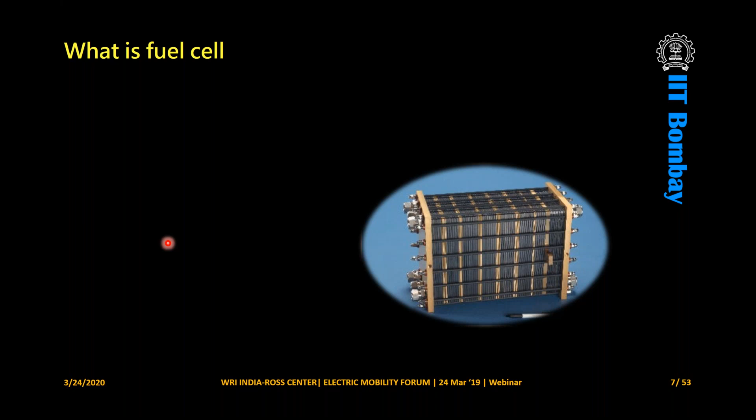That's the reason - one of the drivers is that we want to get rid of the global warming problem, and fuel cell is one of the components or contenders which is believed can also help with that.

So what is a fuel cell? Fuel cell is an electrochemical device which converts chemical energy directly to electrical energy. It has some salient features like higher efficiency, higher lifetime, no moving parts, extremely quiet in operation, and less emissions.

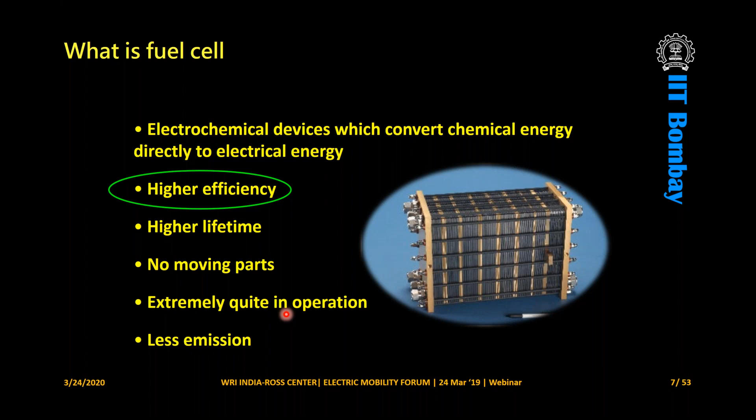If we look at the higher efficiency point of view, to understand how it helps with the global warming problem, let us take an efficiency and business-as-usual scenario: where we are burning coal in a thermal power plant, we get 25% efficiency - that means electricity - and 75% wastage of heat.

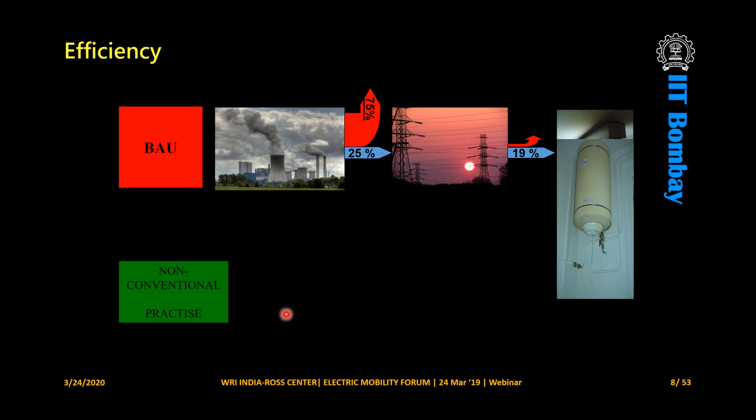If you are transmitting, finally you are going to get in the range of 19% of electricity. This is an Indian context where the transmission loss is also very high. And then this particular energy, which is being transmitted from the thermal power plant, is being used for fan or light. But when it is used for heating the water, then I feel it's a crime, because already we have wasted 75% of the energy as heat, and then again we are using this particular energy for heating the water.

What could be the non-conventional practice and how we can improve the efficiencies? If we take, let's say, normal LPG gas, and you have a burner and directly try to heat, you will be able to achieve 65% efficiency compared to the 19% efficiency, which helps give the life I was talking about earlier, 300 years, that can go immediately three-fold to 900 years. So if you are also taking some appliances which are efficient, it also increases the lifetime of the reserved fossil fuel, so that scientists have some time to think, and then we can have alternative solutions.

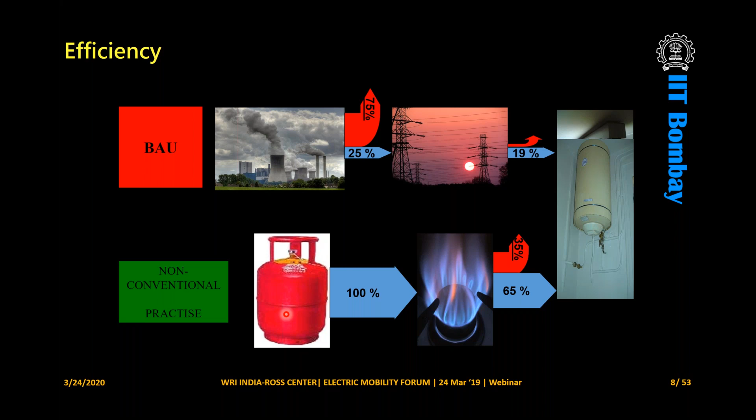Now if you take the efficiency comparison in the conventional system, like at present what we have: fossil fuel, then combustion, then mechanical, then electrical, then electricity. The characteristics of this particular system is it emits direct greenhouse gas, it's a high temperature operation, so you'll be having NOx and other pollution as well. It's lower efficiency, and even if you are operating at partial load, it gives you even worse efficiency, lower than that. And it's loud operation.

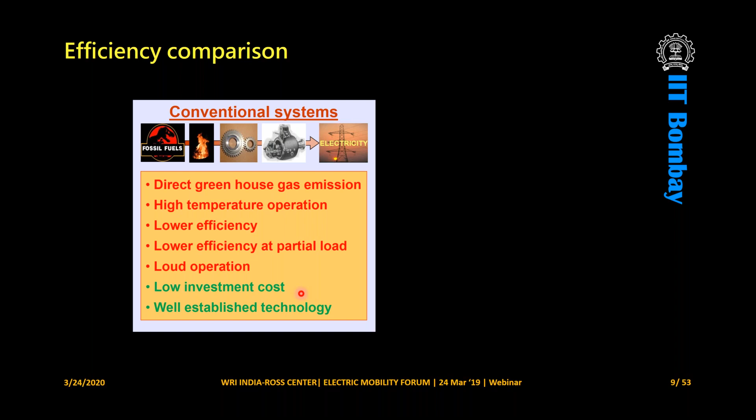The good part of it is it's having low investment cost, as well as it's a well established technology. Compared to that, if you go for fuel cell based technology, it's an indirect or lower emission compared to that, as it's having higher efficiency. The good part of this is that if you are operating fuel cell at partial load, you even get more efficiency compared to the rated power.

So this makes fuel cell very attractive compared to the conventional system. Like if you are going for a city where you will be operating always in partial load, you will be getting much higher efficiency. But in conventional system, we know that if your vehicle is running in partial load in a city type of system, you will be having lower mileage. The other interesting part of this is that it's quiet in operation. The bad part of this is it's actually still in R&D, and it's having high investment cost at present.

Now, also I wanted to share one more thing. When we talk about efficiency of the conventional system as well as the fuel cell based system, I'll be taking a ballpark number. In case of fuel cell, we say 45 to 50% efficiency, what we have achieved. Compared to the conventional system, when you are talking about, let's say 30%, so there are people who can argue that it's only 15% difference, not a big deal.

One thing we should remember: in case of conventional system, when you are talking about efficiency, it is the highest achievable efficiency. When you are talking about the fuel cell, it is the lowest efficiency that we can get, and at partial load it will be going up. So these are actually the two extreme boundaries of the band that we are talking about in the efficiency range. In one case it is the minimum, in the other case it's the maximum. So it's not good to compare the efficiencies directly when talking about fuel cell and a conventional system.

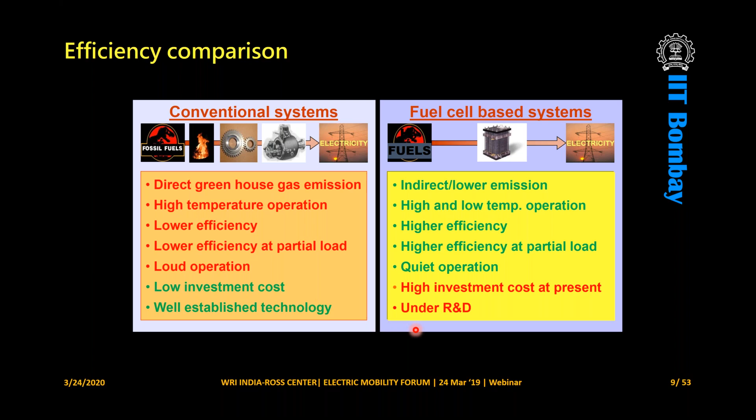Then for the efficiency comparison here, temperature is plotted against efficiency, and this is the fuel cell efficiency. You can see that with the increase in temperature, fuel cell efficiency comes down. With the increase in temperature, the Carnot efficiency increases, and it looks something like that. You can see that at the low temperature region, you will be having much higher efficiency compared to the Carnot efficiency. And ideally, you'll be getting at standard condition around 83% efficiency, as shown here.

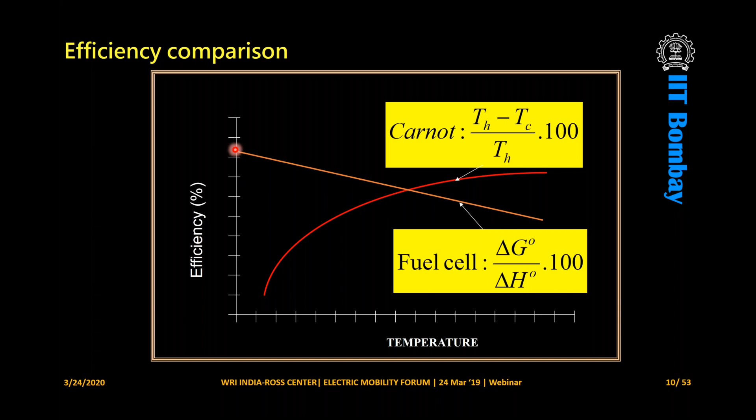How a fuel cell looks like and how it is different. In the next few slides, I'll try to construct the fuel cell from an IC engine point of view.

In case of a fuel cell, fuel and oxidant is being given. Like in a conventional IC engine chamber where you are giving fuel and oxidant together, as soon as you give them there, combustion will take place, and as a result of that combustion, the fuel will be oxidized and oxygen is going to get reduced, and finally you will be getting combustion taking place.

And if you see very carefully, you will be able to know that oxidation and reduction means there is an electron transition taking place there, and so then we are going to get heat.

Now we know that electricity is nothing but the amount of electrons flowing through the external circuit per unit time. So what we are seeing here is that electrons going from fuel to oxidant, and then we are getting oxidation and reduction.

Somehow if you can arrange this electron mixing, we can get this electron through our external circuit. So instead of getting heat and light, we can get electricity. That means when we are converting chemical energy, we can get either chemical to heat energy, or we can avoid heat and get directly electricity.

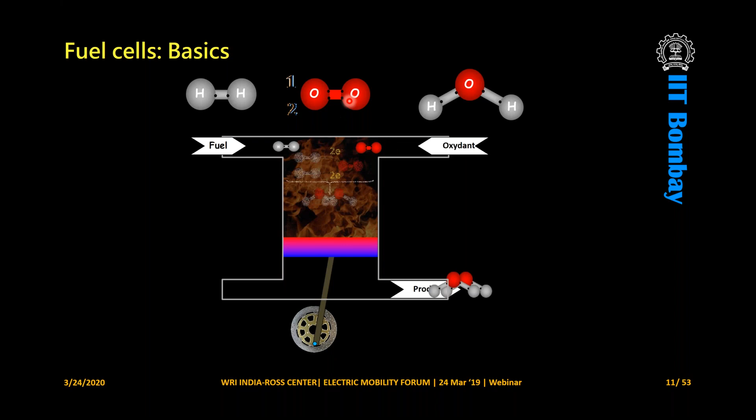How can you do this? For doing this, the first thing you need to do is arrest this electron that is going from hydrogen to oxygen, along with the oxidation and reduction that is happening there.

So for that, first you try to take a membrane like this, which arrests this electron movement from hydrogen to oxygen. Instead of having one chamber like in the combustion chamber, now we have made two chambers, and electron cannot go from one chamber to the other through this particular separator, but this separator will be good for maintaining charge neutrality.

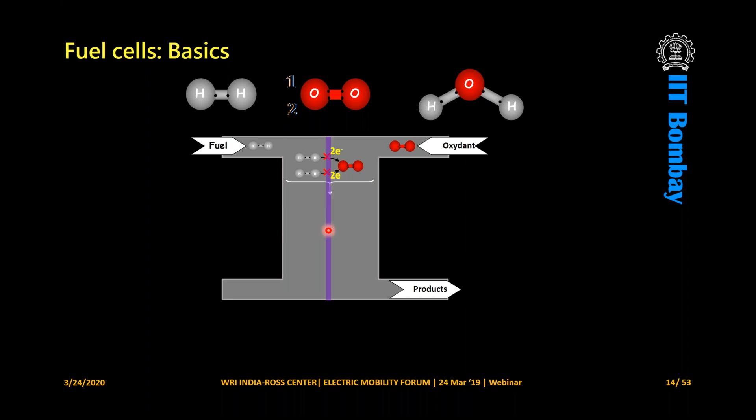So it will be allowing ions to move, and then what will happen with the electron? This is that small place, the separator, and now this electron will be coming here and it will be going through the external circuit, and then you will be getting electricity produced.

On the other side, electrons will be coming through this, your ions will be coming, and then they will be combining together with oxygen, and you will be getting the same reaction we talked about in combustion. But now it is a controlled electron movement, so you can get electricity instead of heat and light. So you will be having two chambers separated by a separator, and a site there where oxidation can take place.

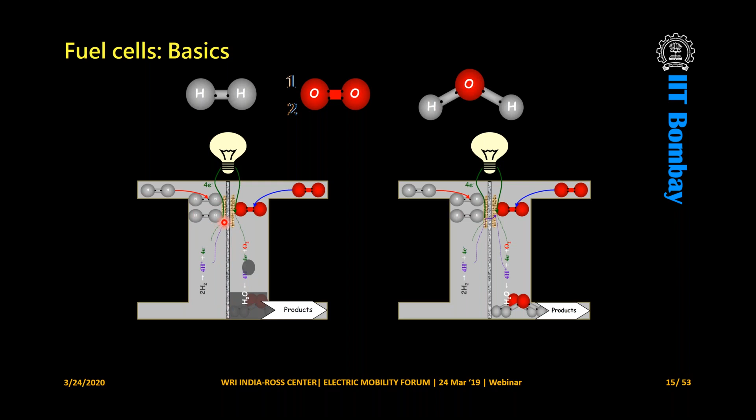So if you go to the basic configuration of a fuel cell, how it looks like: you will be having an electrolyte. We call this an electrolyte. This is earlier what I was talking about, a separator which separates both the chambers.

Then you will be having a catalyst layer. Here you will be having one catalyst layer. This is the other one, we call it an electrode. Then you will be having a gas diffusion layer, also called a support layer, which gives support to the catalyst layer.

And then finally you will be having the flow field through which gas will be passing through the fuel cell. One side you call the anode, the other side you call the cathode.

Now, when we talk about the dimensions, I wanted to mention here: the typical dimension of the electrolyte in a fuel cell will be in the range of 100 microns, which is like a normal A4 size paper thickness. Then the electrode will be in the range of 15 to 20 microns. After that, the gas diffusion layer will be in the range of 0.3 millimeters, that is around 300 microns.

And then if you see the flow field design, that flow field will be in the range of 3 mm. So I was trying to tell you that the increase in dimension is on the order of magnitude of almost 10.

The actual reaction that powers this happens between the electrolyte and the electrode, which is hardly 100 microns thick. Why I'm telling you this is because in the next few slides we'll be talking about the volume, space, and weight required for the transport sector, and who is contributing to that, and really what the contribution is. That's what we are going to discuss.

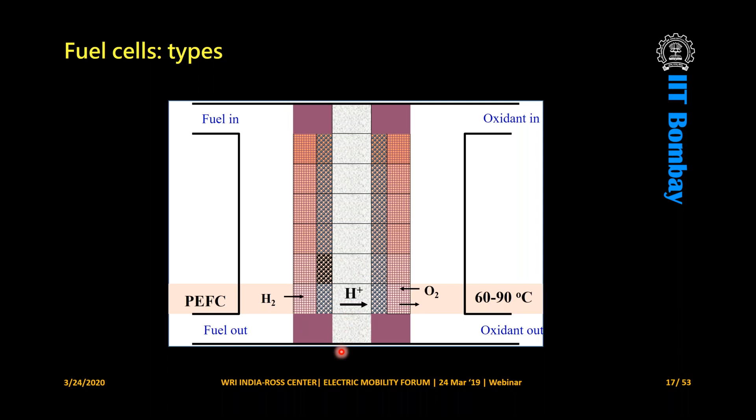What are the types of fuel cells? There are different types available in the market, like the polymer electrolyte fuel cell. This is one where hydrogen is used, and the H+ ion goes through the electrolyte, and through the external circuit you get the electron coming out, giving power and electricity. You use oxygen here, and you get water as a byproduct.

Similarly, the other one we call the direct methanol fuel cell, where methanol is used as fuel instead of hydrogen, and the rest of the things are similar to the fuel cell.

The operating temperature increases as we go along, and different types of fuel cells come up, like the alkaline fuel cell. I don't have time because we want to move to other things, so I'm going a bit fast here and not discussing too much. I'm mainly discussing this thinking of a wide audience, since probably some people will not have any idea about fuel cells. For those who already know, I apologize, because we'll be discussing more interesting aspects in my next part.

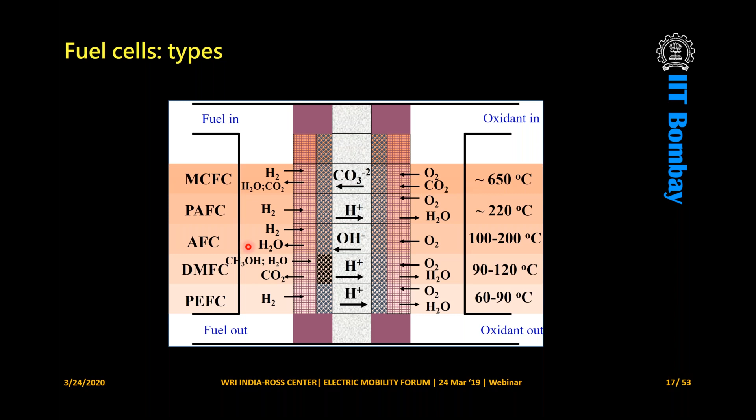The next one is the molten carbonate fuel cell, with operating temperature of 650 degrees centigrade, and the other is the solid oxide fuel cell, which is 750 to 900 degrees centigrade. You can see the temperature increasing from room temperature to 900 or 1000 degrees centigrade. Based on this, for different types of applications, different types of fuel cells are used.

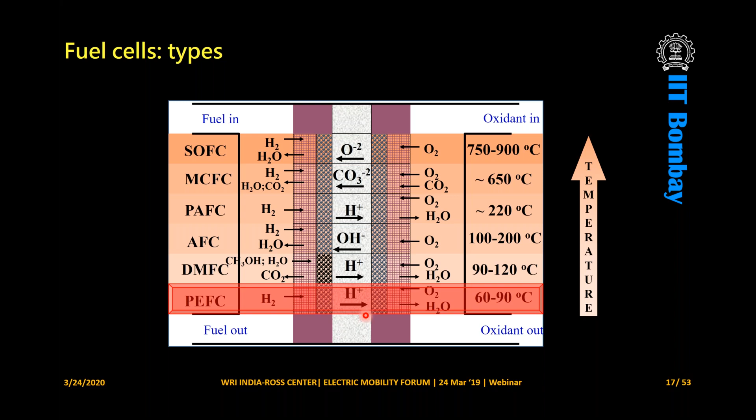For the automobile sector, the polymer electrolyte fuel cell is considered the main contender and is being explored.

I'm going very fast in this slide. The naming of fuel cells is very interesting—sometimes names are based on the electrolyte, what I was calling the separator in the middle. So you have alkaline, polymer, phosphoric acid, molten carbonate, and solid oxide fuel cells. These are mainly named based on the electrolyte.

Also, when using the fuel as the basis, some fuel cells are named accordingly, like direct alcohol fuel cell, direct methanol, direct ethanol, direct borohydride, direct carbon fuel cell, direct formic acid, and microbial fuel cell. These are based on the fuel being used.

Now we are concentrating on the fuel cell important for the automobile sector: the polymer electrolyte fuel cell. In this type, hydrogen is given and oxidized on the anode, then the electron goes through the external circuit, while the H+ ion goes through the electrolyte to the cathode side. On the cathode side it combines with the electron and oxygen to produce water. This is how electricity is produced in a fuel cell using the oxidation tendency of the fuel, mainly hydrogen.

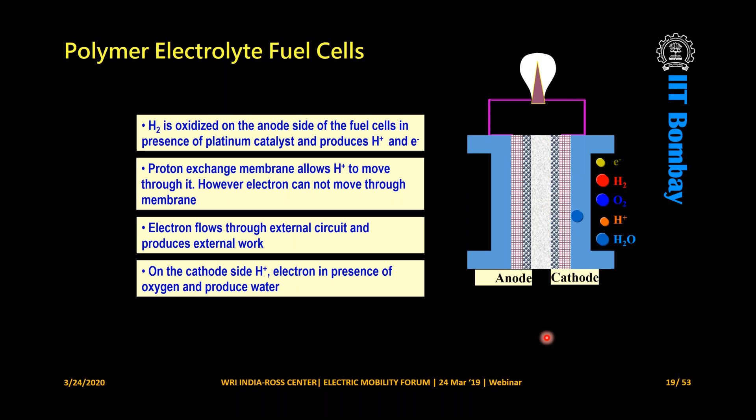Now let's look at the thermodynamics of the fuel cell a little. If we talk about the fuel cell voltage, how much you get per cell can always be calculated from the Gibbs free energy divided by the total Faraday number, and that number comes out in the range of 1.23 volts per cell.

This is very important because when thinking about the stack and other things, it helps to understand why we need a multi-cell stack. We can get this from the delta G value for hydrogen and oxygen giving water, which is 237. If you divide by N equals 2 and F equals 96485, you get 1.23 volts per cell.

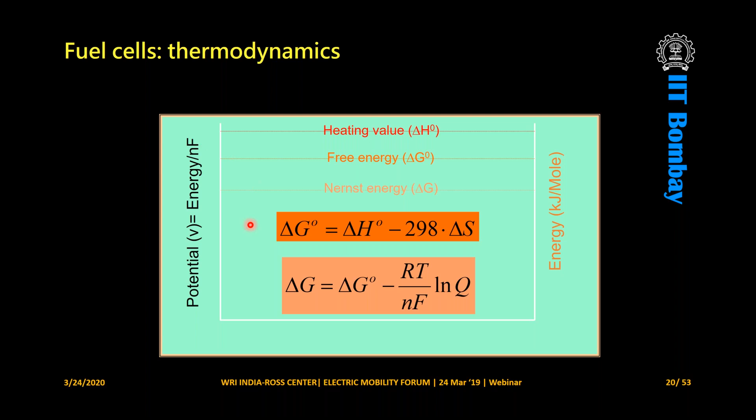But this is an open circuit voltage. If you are going for the operation, then you'll also have to accept the losses. There are different types of losses we call sometimes overpotential loss or polarization loss. These are the different names, and these are the different types of losses: activation loss, ohmic loss, and concentration loss mainly. And these are the equations.

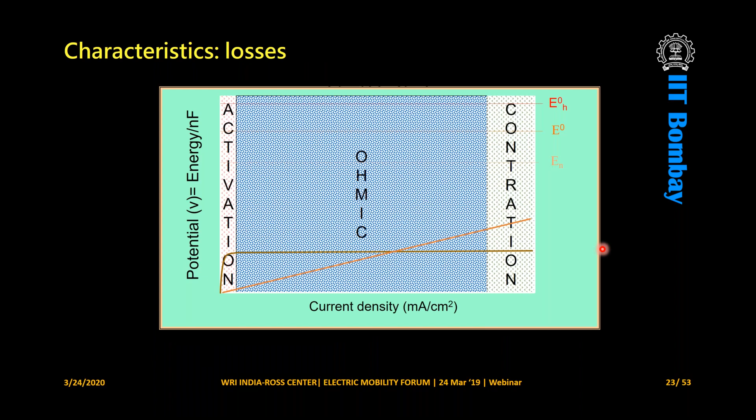We are not going in the detail of the equation, but we can go by the trend. So activation losses look like this, and ohmic loss is linear, it follows Ohm's law. And this is the mass transfer loss or concentration loss, which is dominant in this zone for the current.

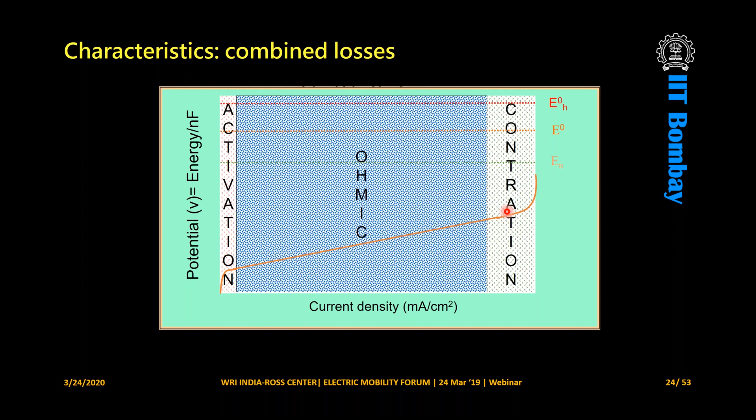If you combine all these losses, the loss looks like this. So you'll have an activation losses zone, ohmic zone, and then this zone dominated, and finally the characteristic curve of the IV characteristic curve of a fuel cell looks like this. So if you are increasing the current, you'll be getting a voltage like this.

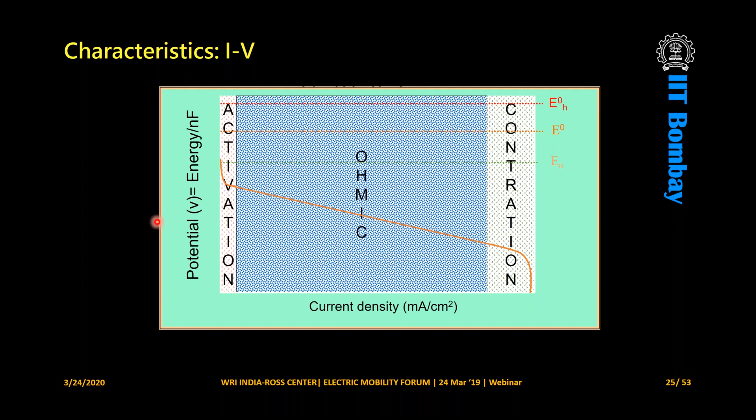Let us take an example of an A4 size paper. I have made an electrode fuel cell of electrode area of an A4 size, which can give you approximately 600 centimeter square area. And if I use that type of electrode, from this power I can get in the range of 300 watt, because 600 into 0.5 watt per centimeter square is going to be 300. So from a single cell I can get this now.

Earlier I told my membrane thickness is also like an A4 size page thickness. So you can think that you have a membrane of thickness like an A4 size page, and you can get 300 watt out of it. If you are attaching two electrodes on both sides, it is hardly 15 micron. And if you use it like this, you'll be getting 1 kilowatt. So that's why it really has very high power density - that's why it's so attractive for transport application.

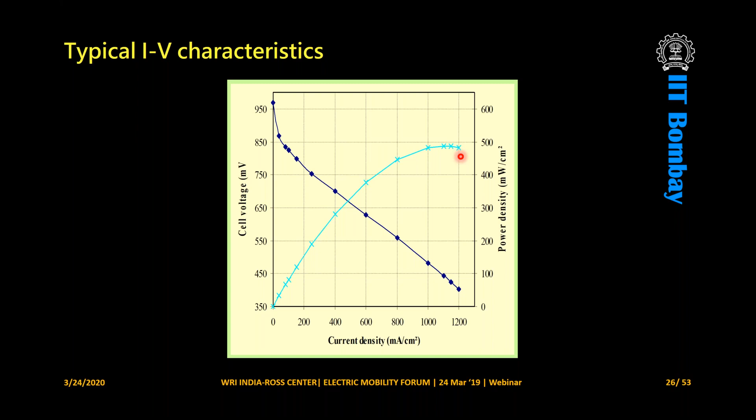Now, electrode - what is there? When you are talking about this particular reaction, hydrogen is getting oxidized and becoming H plus ion and electron on the anode side, and on the cathode side, oxygen is getting reduced with H plus ion and electron, giving you water. You need, if you want to perform this at room temperature or very low temperature, a precious metal catalyst like platinum. It looks like this, but platinum you need in very small size - generally 2 to 4 nanometer, that's the platinum size - but that is being structured and designed on a carbon which has a size of 20 to 40 nano.

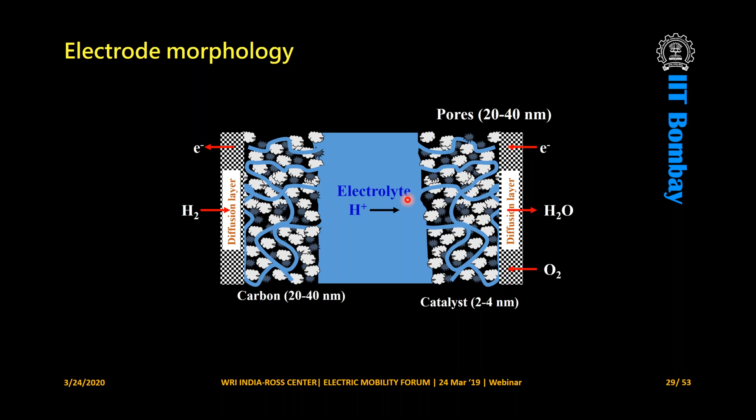So here you can see carbon, and these are the platinum. And then you will have a porous carbon electrode that is being made. Why need porous? Because through the pores gas can go and then react on the platinum surface. This is one of the things people believe is the main culprit why fuel cell is not coming into the market. And then the morphology - if you see, this is your electrolyte, and this is your electrode, where gray color is your catalyst and white color is your carbon. And then you have also a noodle type of design which connects all the platinum to the electrolyte, so that H plus ion can move through this electrolyte and go to the other side. So this is the electrode morphology.

Then the next one, as I was telling, after electrode you will have an important component, the bipolar plate. So the role of the bipolar plate is to distribute the gases.

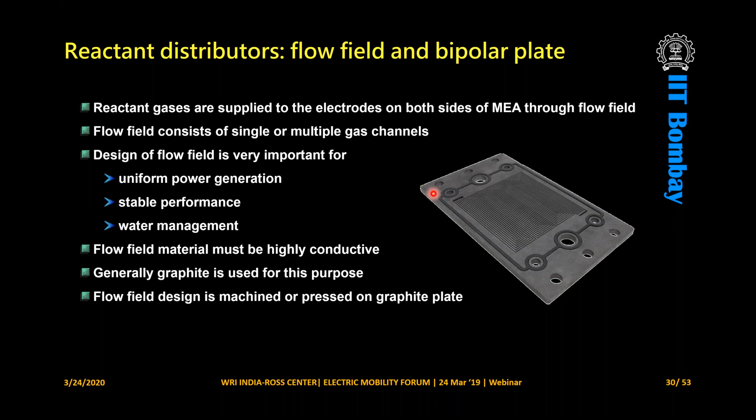So you'll be having channels through it, and the gas is getting distributed. This particular plate has a thickness of 3 mm, and that's why the entire volume and weight is going to come mainly from this component. If you are thinking about the automobile sector and want to do R&D, you need to work on this. At present, people try to use graphite based plates, which is why you need a very thick plate. These are some of the conventionally used flow fields. And if you are giving gases, you'll have a pressure drop, which creates non-uniformity if you are making a scale-up system when going from the lab scale to the automobile sector.

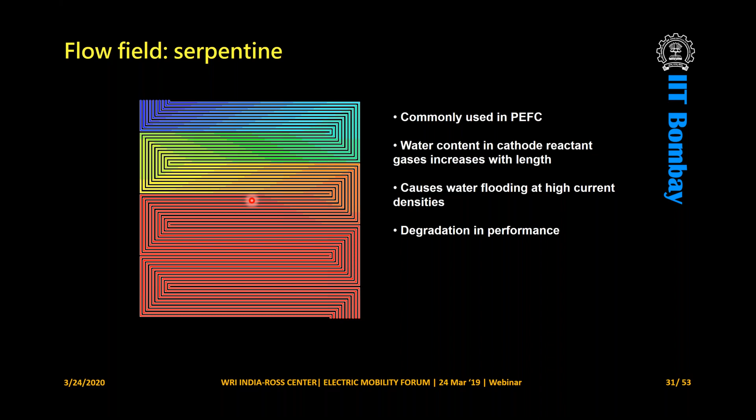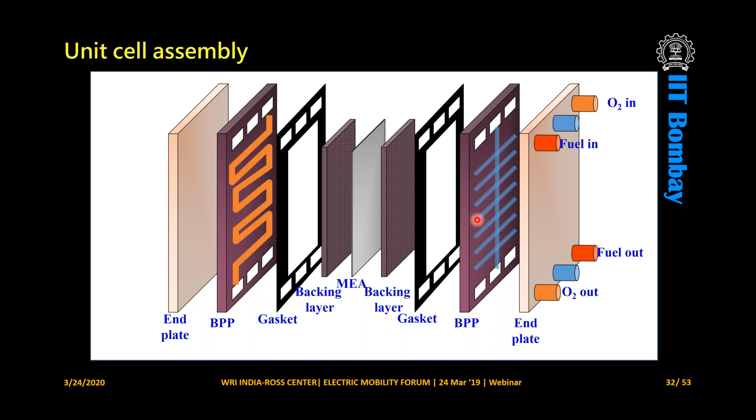If you see that unit cell, this is another way of looking at it. This is your membrane electrode assembly, known as MEA. Then it's your backing layer or diffusion layer, then your gasket, then your bipolar plate. From both sides you make an end plate, and your single cell assembly is ready, which will be able to give you a voltage of 0.5 or 0.6 volt. These are the inlets: fuel inlet, fuel outlet, oxygen inlet, outlet, and you will also have a coolant inlet and coolant outlet. This is the unit cell assembly.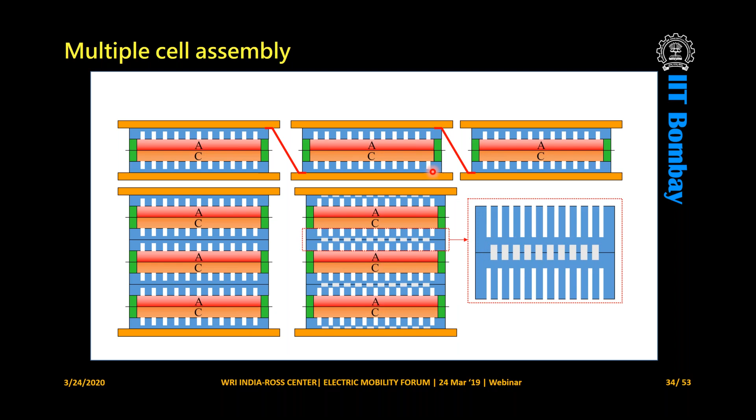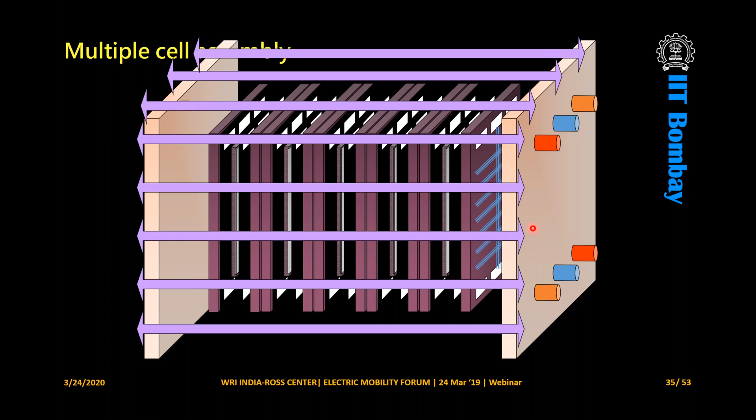Now, if you want to make multiple cells, you need to put them in series. But this is not the right way of doing a series connection; you can put one after another. So you can stack this, and we call it a fuel cell stack. Anode and cathodes are there combinedly, and this is how it looks like. When you have a multiple cell stack, you are putting multiple cells together and stacking them, reaching a desired level of voltage and also a desired level of current from the electrode area. So this is how a fuel cell looks like.

Now, where does this fuel come from, what fuels can it accept, and where does this fuel come from? There are three different ways that we can get fuel: one is from fossil fuel, another is from nuclear energy, and third is from renewable energy. If you are talking about fossil fuel, this is a conventional way of producing hydrogen, where coal, oil, or natural gas is used. In case of renewable, you can use solar thermal, solar photovoltaics, wind, or biomass, and you can also get hydrogen.

Now, in case of fossil fuel, this is the chemical energy, and then you can use reforming. I'm not going into more detail of this, but through reforming you can get hydrogen. However, an important thing is that after reforming you can also get carbon monoxide, which is very much poisonous for the catalyst used in the fuel cell.

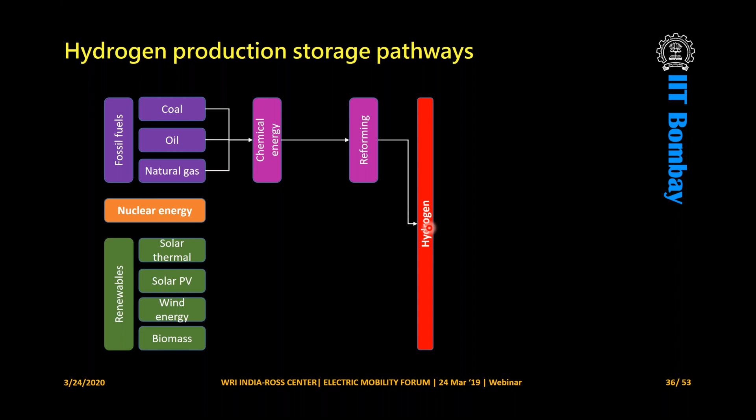The other option is nuclear energy or solar thermal, where you can concentrate with a higher concentration and use that thermal energy to directly do thermolysis of water instead of electrolysis, producing hydrogen and oxygen. It is also thought that this would be one of the sustainable backbones for the hydrogen economy.

Next, if you are using solar photovoltaics and wind, you can directly get electricity and use it in the electrolysis process. So sometimes it's called solar hydrogen or renewable hydrogen. The advantage of this is that you will not have any poisonous carbon monoxide in it, so you can directly use it in a fuel cell without any problem. Also, in case of biomass, similar to natural gas, you can get hydrogen from biomass as well through reforming.

After that, you get this hydrogen, and you need to store that hydrogen. There are different options available for it. You can also do reforming on board sometimes, but instead of on board reforming, it's better to do reforming centrally and then store it on board. That will be a much better option.

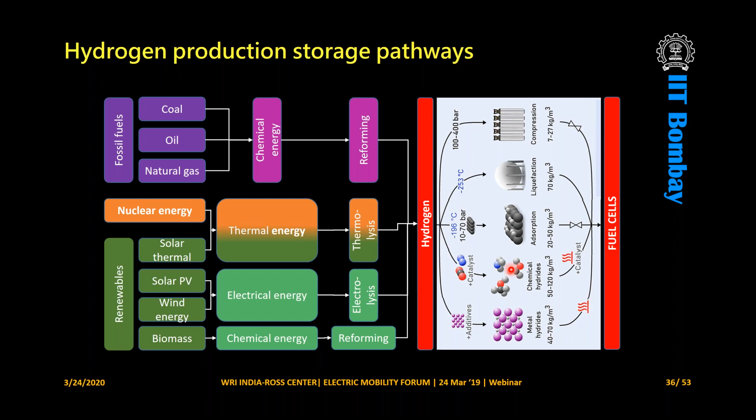Now what are the targets for hydrogen storage, given by DOE. This is the target for gravimetric capacity, in weight percent. Sometimes people get confused - this is not only the materials, it is the system capacity, meaning your material plus the system balance of plant. That system gravimetric capacity should be 4.5, 5.5, and ultimately 6.5.

System volumetric capacity is 30, 40, and 50. Now I wanted to give an idea that if you are storing hydrogen at 700 bar, the volumetric capacity becomes 62.5.

The refueling time should be 3 to 5 minutes. This is one of the major bottlenecks if you are going for metal hydride and other storage. But for high pressure tank, this is an advantage because you can easily store at 700 bar within 3 to 5 minutes, and the total life is expected to be 1500 cycles.

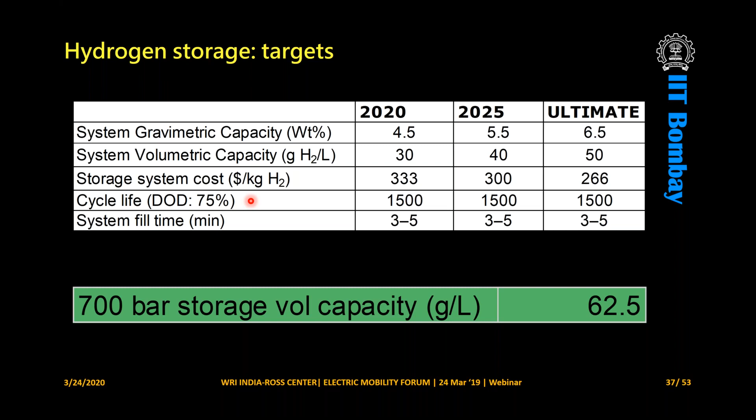That is up to depth of 75%. Depth of discharge is something like a battery - that means if you are emptying 3/4 of the storage. If you go for fuel cell stack, this is the target that's being given.

Power density is 3,000, or 3 kilowatt per liter, and also 2 kilowatt per kg is the specific power. Cost is 53. These are the 3 points which are very much crucial for the automobile sector.

Efficiency people have achieved is in the range of 60%, or 55-60% people have achieved. So this is not... so these are the major challenges that are there.

Durability targets are 3,900 and ultimately 5,000, 8,000. Even if I'm talking about 5,000 in an Indian context, if I tell you I'm going to sell a car whose fuel cell is having a life of 5,000, that means your engine is having 5,000. It sounds like that's having very less. 5,000 will not be appreciated at all.

But if we talk in terms of kilometers, taking an average speed of let's say 20 to 25 kilometers per hour, that gives us actually 1,25,000 kilometers, which for Indian roads is even more than enough. Even my car, which I've been driving for the last 15 years, I still have not crossed 70,000 kilometers. So that's why this number, though it looks very small, is a good number for automobiles.

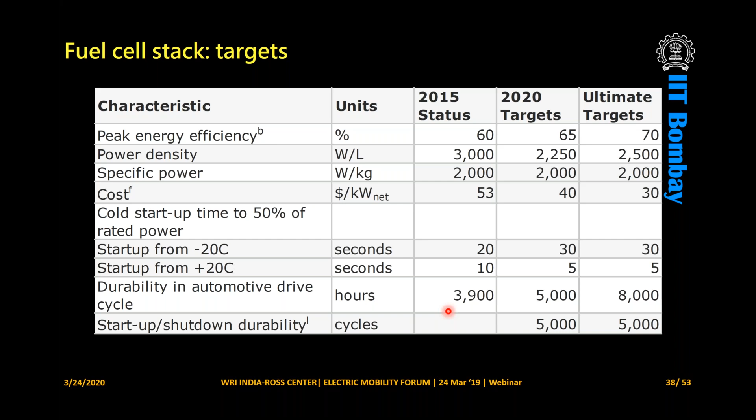And if you go for system level, the one I was talking about at the stack level - system means if you are also including balance of plant and other things, then the weight, power density and specific density can come down from that 3, to 640 watt per liter. This is if you include your reactant gas delivery system and all other things.

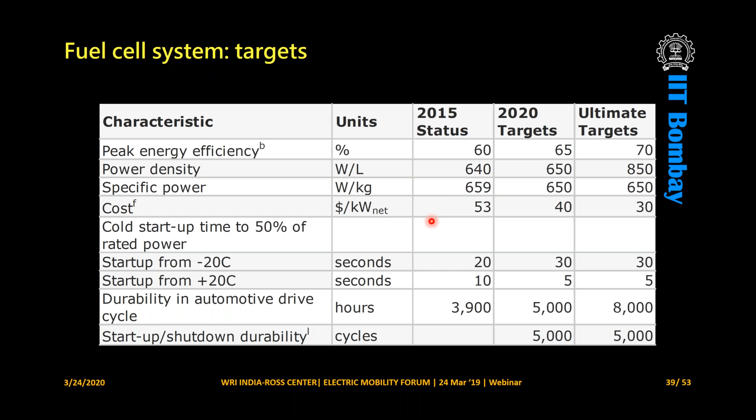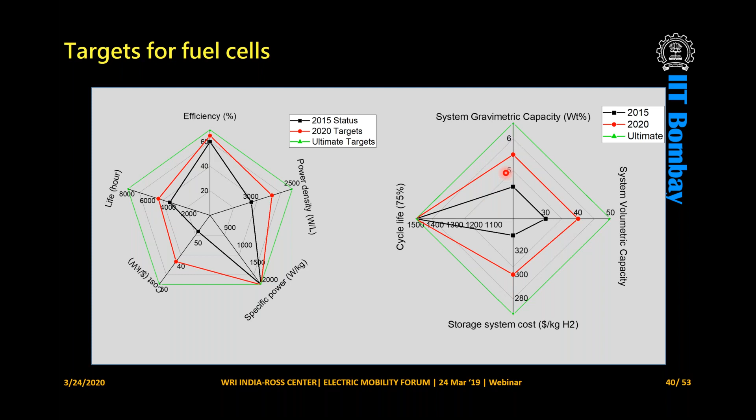From the storage point of view, this is a cycle showing what is being targeted, or the ultimate goal. These are the same table I am putting in a spider chart, showing the cost and other factors.

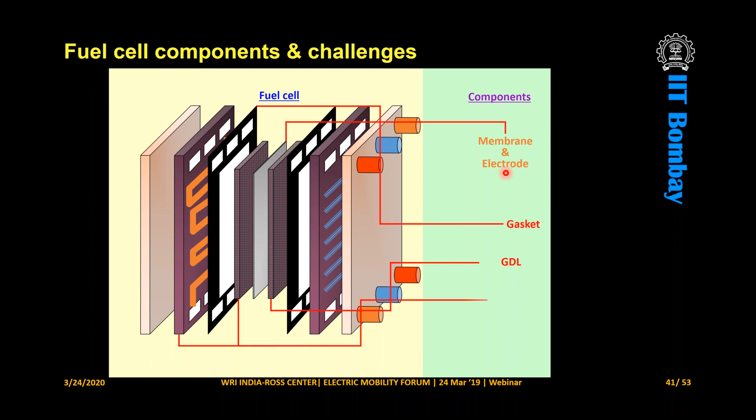Now, since I have expertise mainly in fuel cells, we will restrict the discussion to fuel cells, not hydrogen storage. So let me show you this same schematic diagram of the different components we have: the membrane electrode assembly here, then gasket, gas diffusion layer, bipolar plate, and end plate.

Now, there is also another design factor, like how you make your flow field design, what are the different types of flow field, the channel design, or your humidification design. These things we also call design factors.

Now, if you talk about the challenges, these are the components. The membrane electrode assembly mainly contributes to the cost and durability of the system, because if your catalyst is not working well, your performance immediately comes down, and the fuel cell reaches the end of its life.

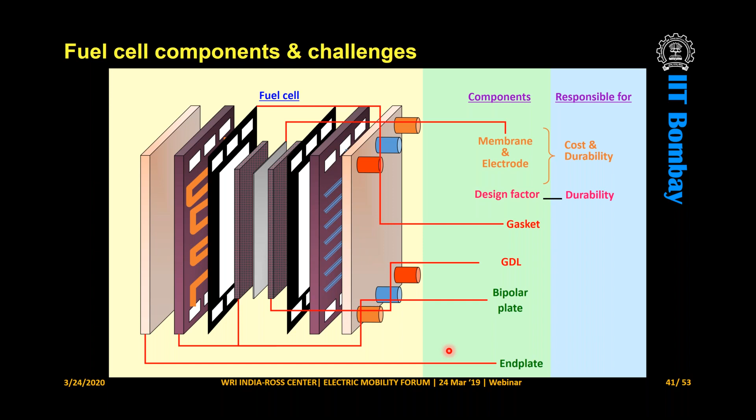The design factor also affects durability—if you have a good design, you'll achieve uniform performance, and with uniform performance you'll have a good life.

Now, the bipolar plate, which I mentioned is 3 mm, and also the end plate, mainly contribute to the weight of the fuel cell, because the rest of the components are only 110 microns.

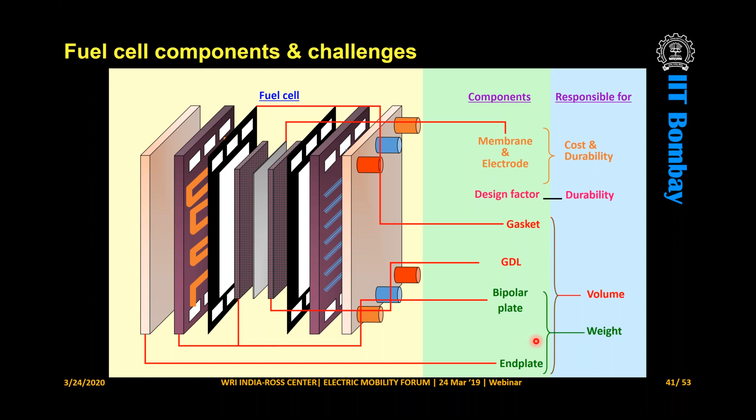And finally, talking about volume, the gasket and GDL layer also contribute, because although they are not very heavy, they have a good thickness and good volume as well.

Now let us talk about cost and who is contributing to it. Let's start with the membrane. In this system, Nafion is used, and I've taken a ballpark number of $200 US per square meter. It can vary—this is just the quote I got, so please do not quote this number to anybody.

So you can see that for 1 kilowatt you get a cost of $40 US—that's just for the membrane. Keep in mind that the target cost is $30 per kilowatt for the fuel cell stack, against which we currently need $40 US just for the membrane.

Catalyst cost, if you calculate in the same manner, comes to $60 US per kilowatt. So the membrane and electrode assembly—its catalyst alone—gives you $100 US per kilowatt.

Now, regarding the membrane, we use Nafion, whose backbone is Teflon—the same material widely used in non-stick cooking utensils, which are very cheap. So it's possible to reduce the cost of the Nafion membrane from $200 to $20, which would be an order of magnitude reduction, since it's only a proprietary cost, not a material cost.

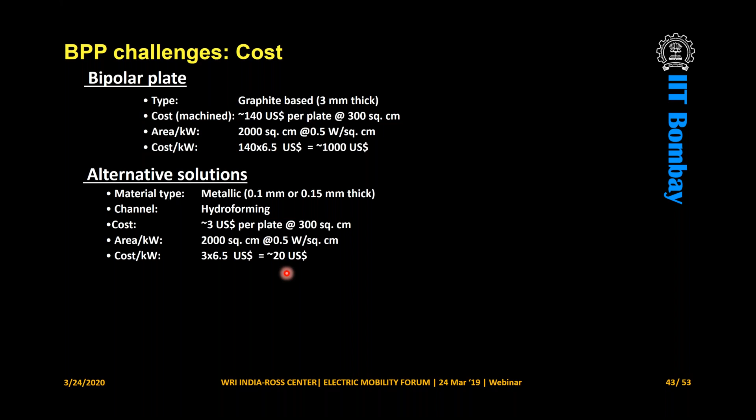With metallic plates, the channel can be made by stamping or hydroforming, reducing the cost to $3 US per plate for 300 square centimeters compared to graphite, giving around $20 US per kilowatt. The target for the bipolar plate is around $3 US.

That's a target, which we can come now. We can see there is a possibility that by mass production, this cost can come down easily.

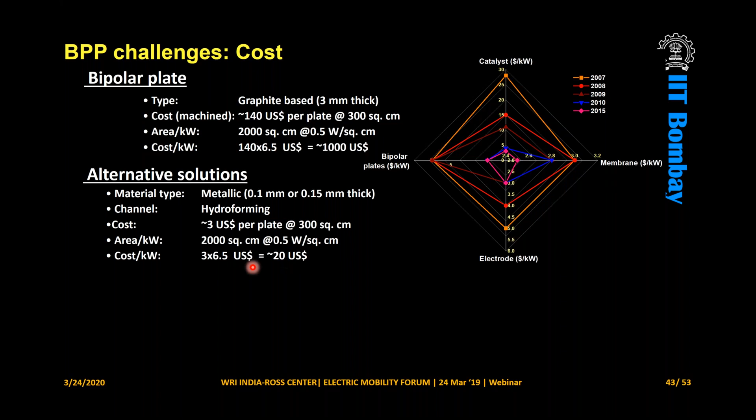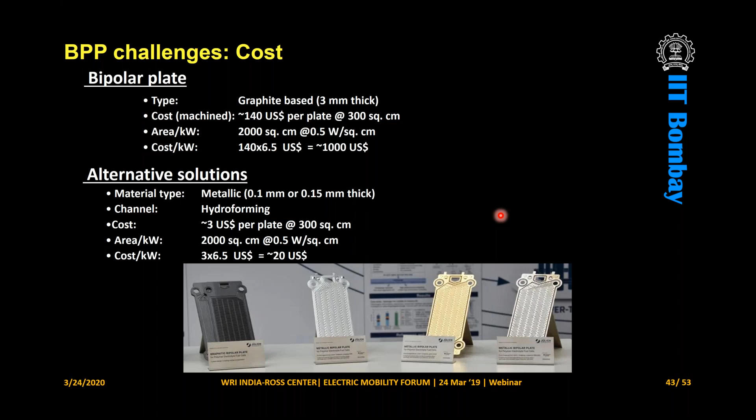So is platinum really the culprit? That's what I want to discuss in the next few slides. Generally, all the people say that if fuel cell is so good, why it's not coming into the market? The answer is cost, cost, and only cost. And if somebody asks where this cost is coming from, it's coming from the platinum. But I want to actually beg to differ, and in lots of places I have told the same opinion. People sometimes think I'm talking nonsense, or that I'm talking out of the box. So let us discuss that.

This is coming from the Indian culture, where if you go to some places, they say, try to invest some money in gold, buy a gold coin, and put it in a locker. My thought process started from there, from a bank where somebody was telling me this.

Then I thought, if that's the case, why is it not true in the case of platinum when I'm using it in a fuel cell? Because we should remember that the platinum being used, the maximum portion of it can be recovered because it's a catalyst. It does not take part in the reaction, it remains as it is.

If you see the research, it says that platinum loss is only around 1% during the entire 5,000 operating hours, and you will have almost 99% of the platinum available to you. If you try to recover that and make a fuel cell again, including all these costs, ultimately it says you will have a 13 to 20% total loss over the lifetime. So you will be able to get around 80 to 87% of the platinum back at the end of the lifetime. So it's not like a lead acid battery.

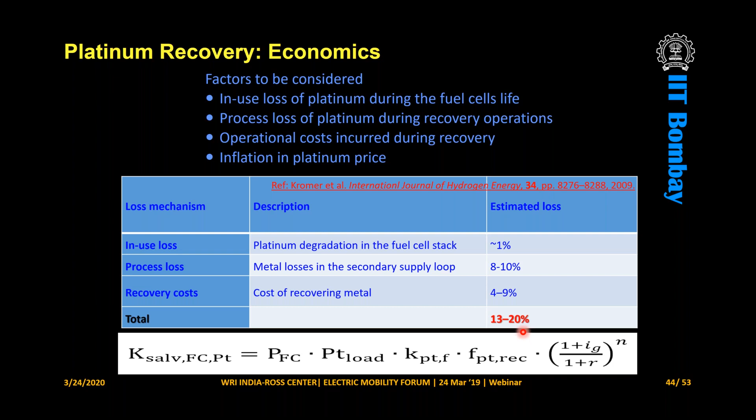When you are buying, you pay a few thousand, and when you sell, you get a few hundred. That's not the case for fuel cell platinum at the end of its lifetime. So I did some calculation based on that, trying to find out the salvage value, taking the cost of platinum at different times.

This is the scenario I took. There are two things: one is the optimistic scenario, one is pessimistic. Scenario one is pessimistic, where I'm using $32 per kilowatt for platinum. On the other side, in scenario two, I'm using only $3, which is what most people suggest we should reduce the cost of platinum to. So I did the calculation.

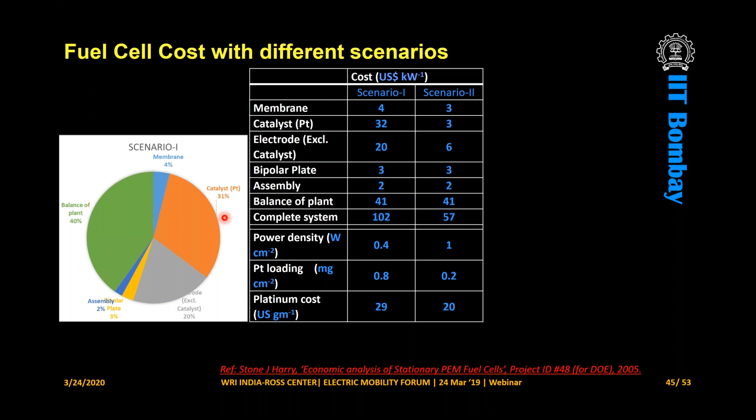You can see how it looks for scenario one, where I'm taking platinum as almost 31% of the cost. And for scenario two, platinum is 5% of the cost. Now I'm going a little fast here because I have only 6 minutes left probably.

So I did the calculation for this. I found the cost of platinum from December 1999, how it varied internationally, and after 5 years I found how the cost was — an 18% per annum increase.

This is after 10 years, and this is after 15 years how it looks like. I did this till January 2015, and using this data, I did all these calculations based on those equations, taking a 5-year life and an 18% platinum price increase, across different countries or economic zones like USA, UK, India, Germany, and other places.

I found that the salvage value for scenario one, the pessimistic one, is almost $61 at the end of the life, and your net—you already have $102.

So you have net present cost, what you are paying is actually $42 in this case, not 102. So this is how it looks like after 5 years if you are having the end of the lifetime.

If you are going for scenario two, the platinum, as you have very less platinum, the platinum salvage value is only 6, and your net present value becomes 51. So if you see, if you have higher platinum loading and are able to recover that, then you'll be able to get good value.

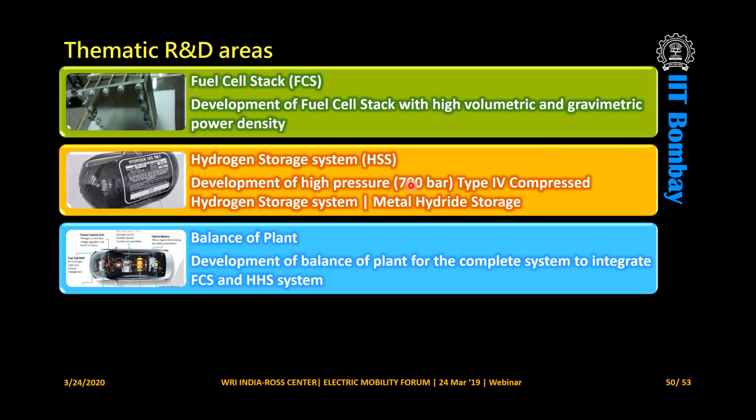The next one is the hydrogen storage system. There is lots of expertise available here for making type 4 hydrogen cylinders, which can sustain up to 700 bar. Also, lots of people are working on metal hydride storage. Very important is balance of plant, we need to work on it, and Tata Motors have already developed that balance of plant while making the fuel cell bus.

Finally, system integration and demonstration. This is very important, and we are lacking in this all over the world, everywhere. There are lots of demonstration projects needed. In India, we have hardly one that is run by Tata Motors for fuel cell, and another one with IOCL, but they are struggling a lot. Whatever I have heard, even getting this particular vehicle registered itself is a big challenge.

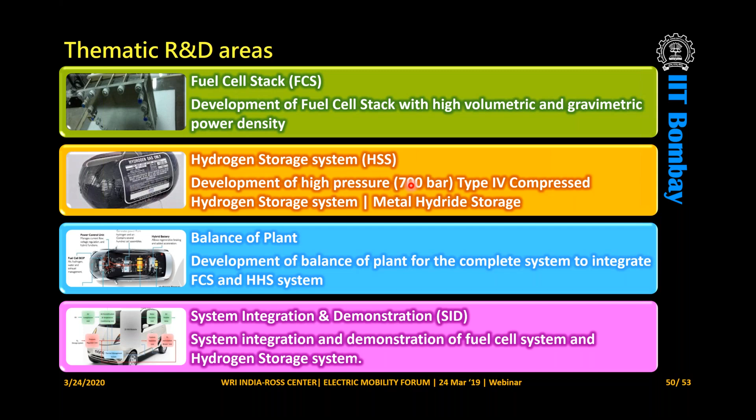Now if we talk about the thematic areas, the fuel cell stack, mainly this is the fuel cell stack performance. Sometimes what happens is that when talking about stack performance or stack testing, we always think we have to buy a fuel cell test station from somewhere, which is very expensive sometimes. Even nowadays I know how to make a fuel cell test station very easily, with the help of other people.

Earlier I had an imported one, and it was very difficult. When one sensor goes wrong, we have to call them, and they will charge you $4,000 for sending a person. It's not rocket science that we cannot do it. So I think for fuel cell, we have a huge opportunity for diagnostic and performance analysis tools.

Then, the clamping system is very important. Sometimes we neglect this when making a stack. Gasket optimization is very important, because most of the time we are very much concerned about membrane or electrode or catalyst, but we always forget the gasket. But this is one of the crucial components when you are scaling up from lab scale to the scaled up version. And then bipolar plate design and materials, that is very important, mainly when talking about the metallic bipolar plate.

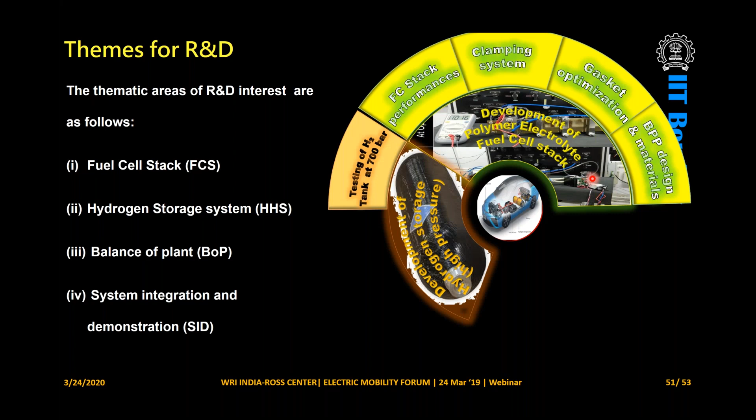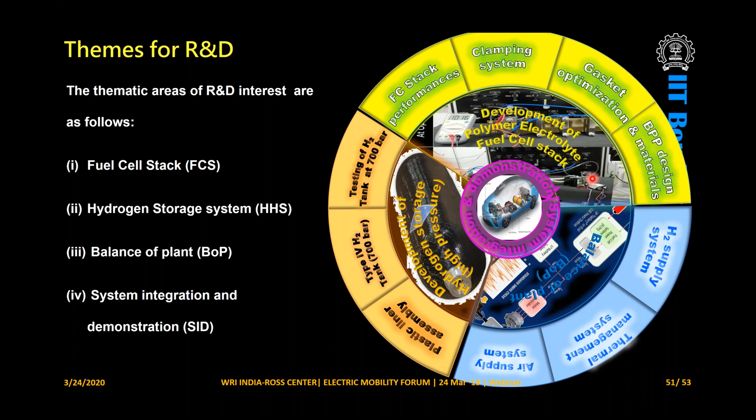Hydrogen storage, of course, the testing facilities are not there, so we need to have them. There are some laboratories now being created for high pressure tanks. And then after that, the hydrogen supply system, thermal management system, and air system for the balance of plant. These are the major thematic areas where we can work in India.

So overall, I would like to conclude. I hope I could maintain my time of 45 minutes.

High cost of platinum should not be blamed. If a proper business model is available, if somebody comes forward, it will be very cheap, and then it will be very easy to penetrate the market for fuel cell.

I think I would be stopping here, and I'll take some questions from the audience. That's all from my side, thank you for your attention.